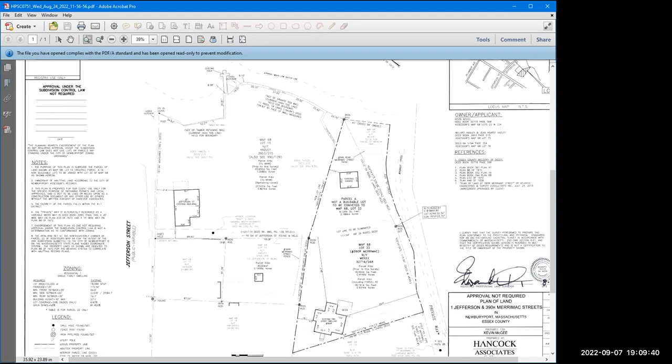Okay, I will take a motion to endorse the A&R plan for 1 Jefferson Street and 390R Merrimack Street. So Alden, second. Second. Okay, second, Rick. I'll take roll. Alden, yes. Bob, yes. Amy, yes. Heather, yes. Rick, yes. Richard, yes. So you have your A&R approved. Thank you very much. Endorsed.

We'll move then to the public hearing continued from our previous meeting on Market Landing Park. There was a list of issues that the board discussed last time that needed to be addressed, and we have representatives from the applicant team here to address them. I'll hand it over to you to speak first.

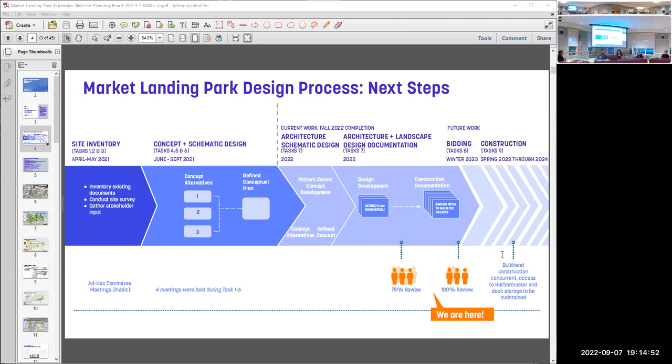Now we'll move into the feedback we received at our last hearing, which fell into a handful of general categories. The first is bicycle circulation and bike parking.

We've looked at adding additional bike parking, particularly on the east side of the park. The city has shared the current bike racks they are using, and we are looking to specify those.

There's a concern about widening the path where the shared use path meets the boardwalk, to provide space for bike dismounting, encourage people to walk through the boardwalk, and give a more generous entry point where there'll be a lot of pedestrian traffic.

We're also looking at redirecting traffic from the shared use path into the parking lot rather than into the future extension of the shared use path in the interim. There was a comment about revisiting the shared use path alignment, which is under the jurisdiction of City Council and the Waterfront Trust.

The second bucket was vehicular circulation and parking. The plan includes 2 EV spots, and the request was to add additional spots or make more spaces EV-ready, which we'll address in the presentation. We've also looked at interim parking conditions after just phase 1 is built, and we have that ready to share with you.

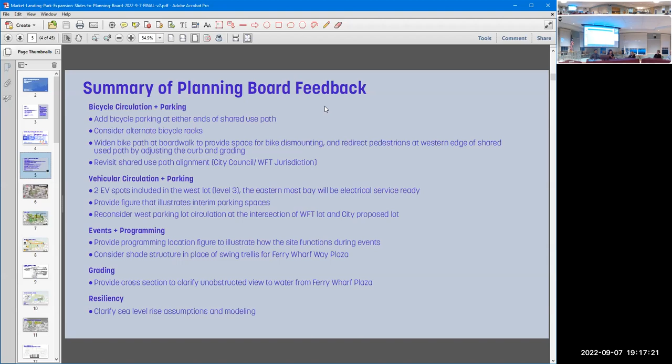For resiliency, we have provided a memo ahead of this meeting with the presentation, and Stephanie will be able to speak to those issues.

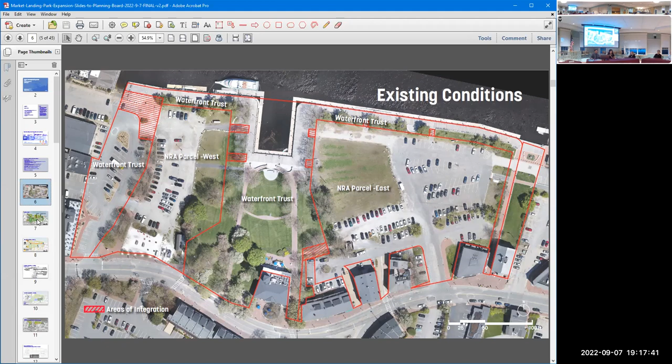Just to recap, this is the existing condition. As a reminder, we're working on the NRA parcel east and west. All of the Waterfront Trust area is existing to remain, and there are a few areas where we're coordinating with them to meet existing grade, which are hatched in red.

The final surface treatment of the area near the dock storage, where we're anticipating that will happen adjacent to the harbor master entry. We know there's been some concerns regarding what that surface treatment will be, and the city has requested that it not be lawn. So we'll be developing the details and material strategy for that in the 100% CDs.

The other thing to note is there have been some comments and recommendations on site furnishings. Because this is a public bid project, all of the site furnishings will have alternates, and we're currently reviewing the phase 1 cost estimate. We'll have a better sense of where we've landed, taking into account the input you've provided and costs and input we've received from previous stakeholders throughout the process.

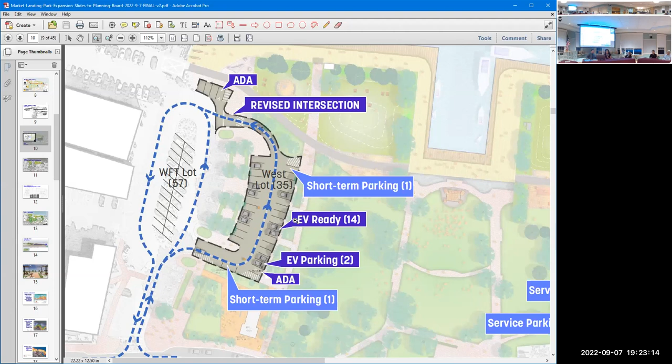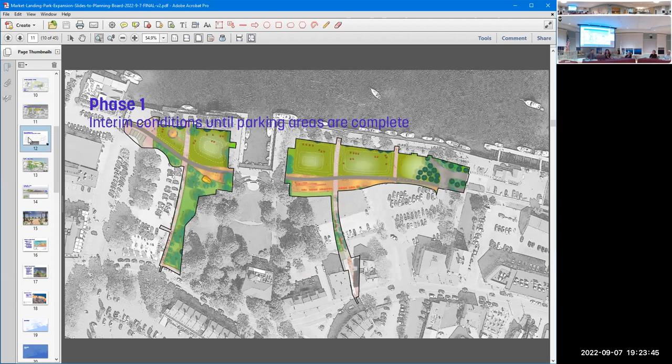And this shows an interim conditions parking proposal. We've managed to keep roughly the same number of parking spots as will be in place when the full parking lots in phase 2 are constructed. So we're very close - for the interim conditions, we'll have 166 spots total, and in the proposed, we'll have 167. I'd note visually, these lots remaining for phase 2, because there isn't the funding for it right now, will essentially be smaller gravel lots. There might be some utilities installed subsurface, but basically it'll be the gravel lots reduced in size, and we'll landscape to the edges as best we can based on the available budget.

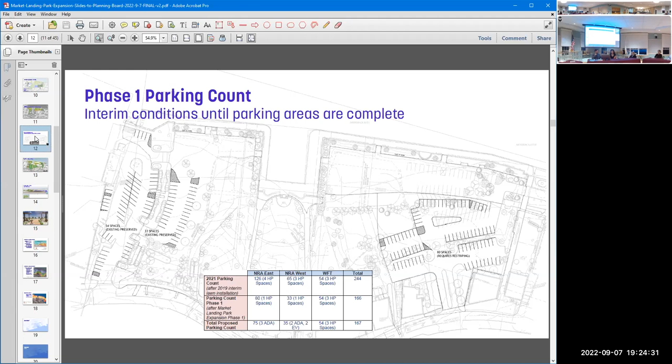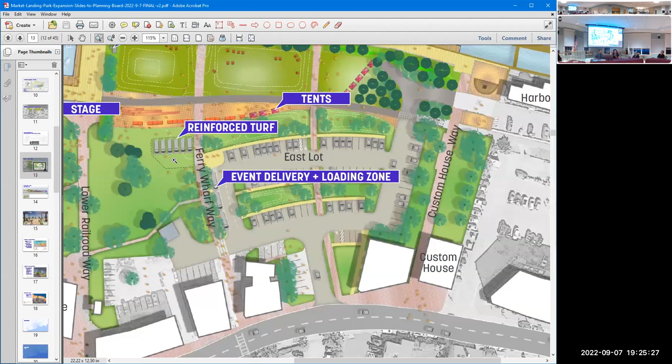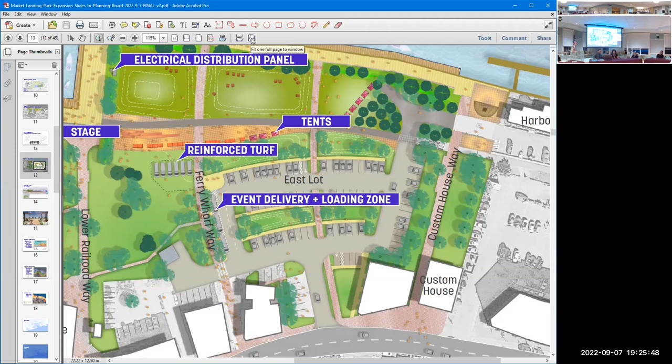And then we've also included a zone of reinforced turf. So this will look like lawn on the surface, but is vehicular grade so that trucks could drive up to this area for loading, unloading. This could also be a space used for food trucks, but it just provides that additional flexibility for future events. We've also shown diagrammatically where tents could be laid out, both in the plaza and in the lawn space adjacent to the harbor master entry drive. And then just noted where the electrical distribution panel will be relocated.

And so these 2 slides speak to the question around topography and views. This is a section we produced very early on to show the concept of grading for this project site. What we really wanted to do with that lawn space right up against the water is to take the height of the existing berms where those pine trees are along the boardwalk and meet that existing level, so that when you're on that lawn, it feels continuous and you're elevated a bit to get those views out to the water. The high point of those berms is at 13.5 elevation. When you're at the plaza or shared use path, you're at 13 or 13.37.

So as you can see, you'd be able to stand on the path and certainly see over that landscape. And we also have a view we can show in the next slide. If you notice the eye level - I'm 5'6", sort of the average human height - I could stand on that shared use path and see out to the water. And that's been the intention there.

Happy to open it up. You may have covered this previously, but I wanted to know, was there any discussion about bike sharing companies in terms of a third party and accommodations for that? Or no?

There hasn't been for this particular project. There was several years ago, we had some of those companies come in. Do we at least have the infrastructure in place so that 20 years out, it's not a major project to put that in? I'd have to say it's so much of an unknown right now as to how that would be integrated based on experience.

What I'd say is the parking areas are already a year or two out, just because of the lack of available funding right now. So I think we have sufficient time to consider incorporating those if it gets momentum, but right now we're not planning for it. Even several years ago, we had some of those folks in, and there wasn't a decision at that time to engage or bring them in.

It was partly on their end, but partly on the city side. So although it hasn't been brought up in relation to this specific project on Market Landing Park, it has been discussed in the city. It's not clear yet exactly how we would integrate that here properly without knowing it's going to be useful this far out. So I'd suggest we consider that for the parking areas, but if that opportunity shows itself, roll it into the parking lot at that point before we get to construction, essentially, based on what we know right now.

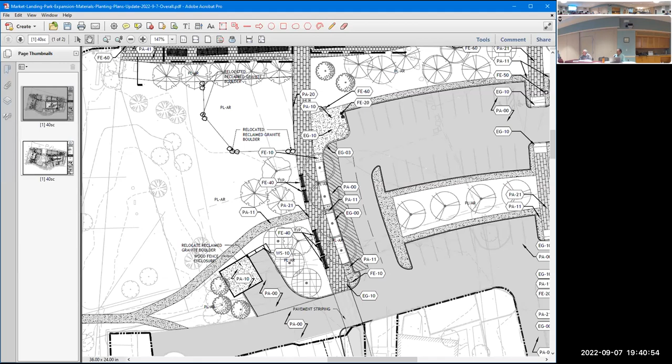It looked different in the presentation. That's part of the problem. When you compare the presentation slide that shows the service parking and the presentation slide that shows the bicycle lanes, they're right behind the hatch line area. So that's why I wanted to make sure. Gotcha, sorry for the confusion. It's probably just because it's such a small scale, and yeah, it will be hard to see.

I was disappointed, because originally we talked about trying to get the racks as close as possible to where people want to be, or where people are likely to go. And those, especially those 5, it's nowhere, it's not a destination there, and nobody's going to bike there. So I would repeat my suggestion from last time that you convert a couple of parking spaces, get rid of 2 parking spaces out of the 12 parking spaces. But I know that vehicles have a bigger constituency than bicycles. It's a hard point, but I'm going to keep saying that.

Over on the east side, where you say there are 3 additional bike racks, just want to clarify - so you've got the existing 3 at Custom House Way, and you're adding 3 more here, on the other side. Correct.

Certainly understand your concern or suggestion about bicycle parking potentially in lieu of vehicular parking. Unfortunately, we did hear the usual concerns and feedback, both from the parking clerk and the Waterfront Trust in particular, who aren't too keen on further reduction of the vehicular parking. Sasaki looked at the viability of putting the racks in based on the site grading, distance, and equipment being put in, and this is where we ended up. We tried to provide a few at the beginning of the trail there like you suggested, but there was a sense that there wasn't quite enough space in there to squeeze those.

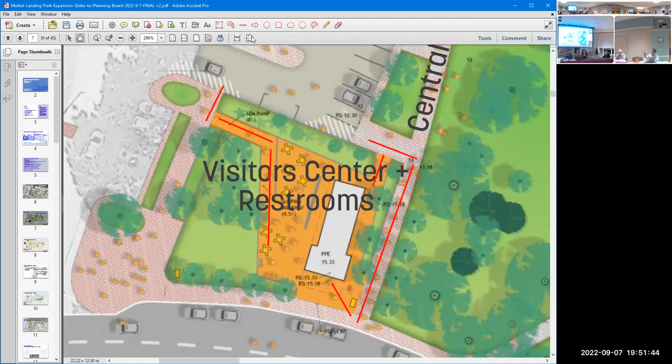There's one plan in your new slides that shows three service parking spaces, and another slide that shows an event delivery and loading area.

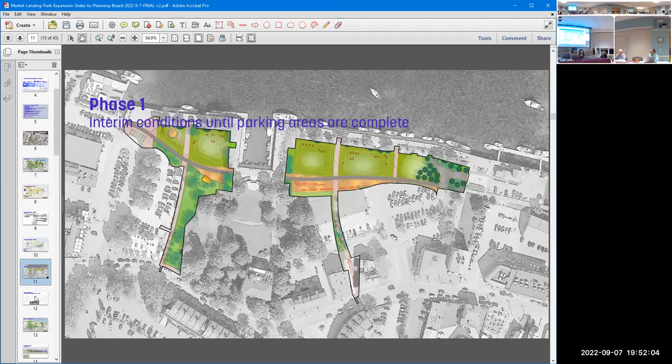I think I just used service as a general category in the larger parking diagram, but it is intended—there was a special request during our stakeholder meetings when we had specific review for vehicular access and for events, that those three areas be specifically loading and delivering for events.

On one of your plans, one of the illustrations, you point to I think three alternates for the swing area, and it says they'll be shown in 100%. So does that mean we're not going to see them?

Just to clarify, what I had talked about with Sasaki is, essentially, as designers they might specify something that's the perfect product. But because we're a public entity, we have to do public bidding. We have to provide alternates as part of the state statutory or regulatory process for procurement. So we provide alternates—they're comparable examples. The bidder, we can sort of take it from there and wrestle with them sometimes if we're trying to press for the right one. But we have to provide alternates during the bid.

One of the discussion points that came up was, as we were discussing with the city council, the budget for the project and the desire to do the base or the frame of this project first, and then prioritize the areas for donations for site elements that would be real tangible elements people could see, and be potentially more interested in funding than say subsurface utilities.

We were looking at the actual cost of each of the individual elements, and some of the swing elements—the structure and the swing itself—would be upwards of $50,000. I had asked them to sharpen the pencils, so to speak, and look at other alternatives. We also looked at, for instance, the timber structures on the rail trail just off the way here, over by Oldies—examples like that would be like a $10,000 installation as opposed to a $50,000 installation.

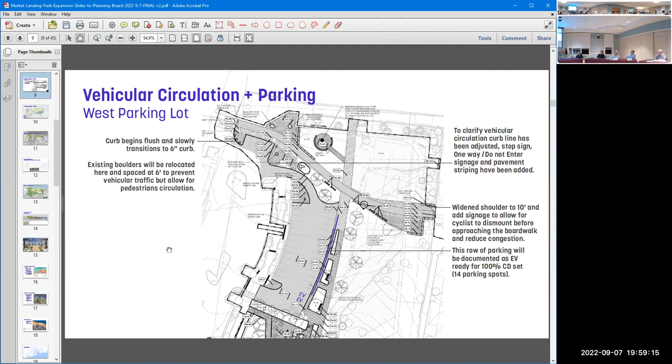On the west parking lot detail that we have, let's just zoom in on that area of the picture. This is just a question for me: the symbology here shows one symbol for going through, and another symbol for this kind of brick shape - I know it's not brick, but that kind of symbol. Does that just refer to the strength of the pavement?

I got you - your concern is that maybe we should provide more of a cue, same treatment of material, because you just didn't know what it is. I think that's referred to as different - right, these are pavers and that is asphalt, to your point.

So I guess maybe you're suggesting that we possibly extend asphalt here. I have no issue or objection with that myself. I don't know, from our perspective, I think it's just a detail adjustment in that area, so I don't see that it's much of a problem.

Gotcha. Would also be - just in that one, just in that one little area where the transition happens. Yep, gotcha, okay.

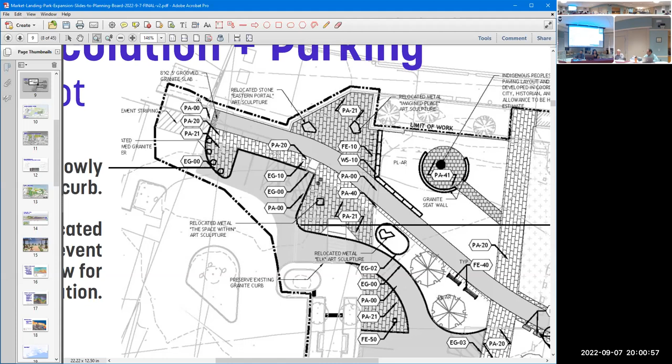The section through the topography section - if you can zoom in, right, with the 13.0, 13.37. That makes it look like that area is higher than the area leading to it. Is that his interpretation?

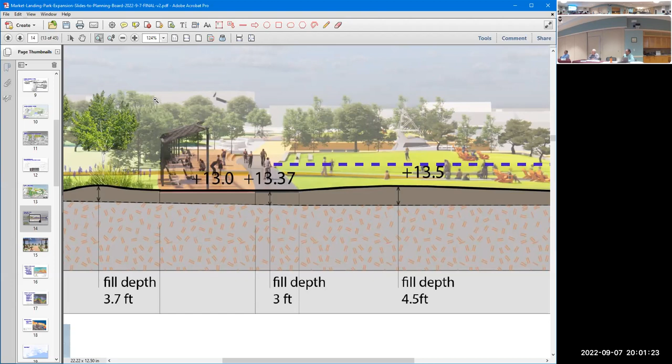No, where the section is cut, that is correct. This is what I was referring to as the grade change. From this point, the shared use path slopes down to meet the boardwalk, and that's where you have that grade change, so the plaza becomes higher than the shared use path.

You can kind of see in the background a little bit of that stepping back here, but as Maren mentioned, you wouldn't necessarily have it right where the cross section is - it's a little more flush here, so it basically tapers towards the embayment. I wonder if that's just that particular point, and things are changing as the swing area is going.

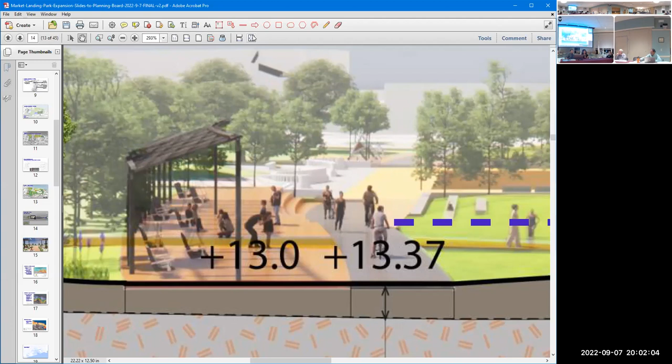Correct. And then my last two questions - I read the report carefully and got confused, and you mentioned it tonight. Why does the Massachusetts projection of the scenario, which is a 50-inch increase, show a smaller flood extent than the FEMA plus 40? I just didn't understand.

No, I'm sorry - it shows a smaller extent for current flooding. Oh, so you're saying why does it show... You said it shows smaller flood extent than FEMA plus SLR. So FEMA plus SLR is FEMA plus 40, and MCFRM is something plus 50, so I just didn't understand.

So it's not a straight addition. It has to do with the MCFRM actually taking different ocean dynamics into account than FEMA does. FEMA doesn't have the detailed topography that was used for the MCFRM. It doesn't include wave runup, but it includes different things in the modeling, so it's not just additive.

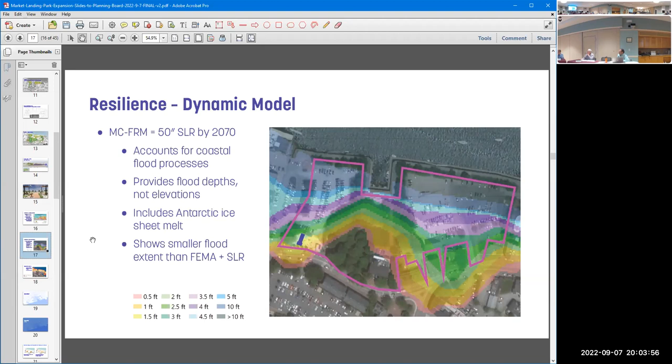And then my last question is about when you get to the point of daily tidal flooding - I don't remember when that is - how will that affect the condition of the paved surfaces and such? If you could go back - you want the site plan?

Forward two slides. So this figure is showing current conditions, current topography, with future mean high water elevations. What it's not showing is the change in topography that will result from this project, so there actually won't be daily flooding on the site because of the project.

So it's going to avoid that - the paths are going to be raised above that level. Right, exactly, so this is what we're avoiding.

I need to look more carefully at the future elevation. Yeah, so between site grading and the bulkhead project, these are all things that are going to eliminate tidal flooding to an extent. There'll come a point, once you get to 6 feet, before that point it's addressed.

Thank you for acknowledging. Sorry.

Anyone else? Heather, do you have anything?

Jamie, yes, can you hear me? Okay, good - can't tell, you can tell if it's green. Oh, it's not. No, push on the power. Testing, you can't hear anything, you just have to see it's green. And then you're going through the system, Heather, and the recording.

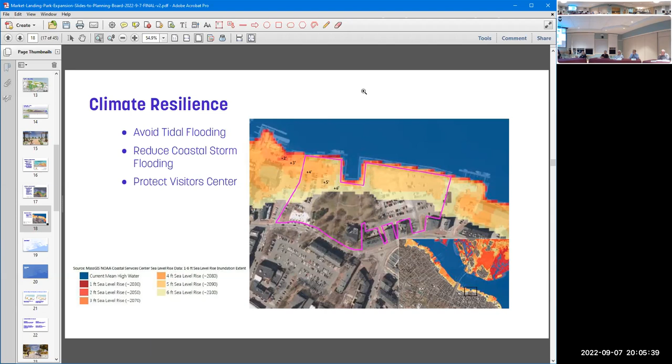Very good, thank you. So all my comments were addressed already by others, but the trellis kind of triggered a new thought in my mind - to the extent it's controversial, I think it only makes it more imperative that we have it well defined at the approval phase. I'm curious, I have a question that's also a comment.

The question would be, I would imagine the entire thing is a product that you have to get three separate product options for. I would think some aspect of it is custom, so you'd get three bids for a custom product. So I think some aspect - the swing, the actual sitting part of the swing and the components - those are products.

But I would think the trellis would be something you could design with some specificity that we could approve, because I think that's just too important an item to leave to some down the road.

Sure, I'll defer to Maren if she wants to speak from the designers' or team's end, but there are some complexities to this. I would suggest, rather than expecting the board to specify the exact product, we set certain parameters for what you're looking for. For instance, if we're talking about integrating the swing elements, we can reference that. We don't want to create a problem under procurement laws where we have to substantively provide what we're looking for, with some vendor alternates. They can come back with a submittal of their own to suggest it meets the criteria, but we have to demonstrate what they're providing.

We did look at, for instance, the wood structures, the timber structures that the city had put in for the rail trail. Those are relatively low cost. We know how the footings are, we know structurally how those are built. But we have to consider whether there's any further structural design needed depending on the item chosen, whether the footing gets adjusted. So I wouldn't want to pin us down to one specific product, but if you want us to be more specific about what's included or not, like Bonnie mentioned earlier, whether there's some sort of canopy that can be placed up there, that might be easier to accomplish than specifying the exact product now.

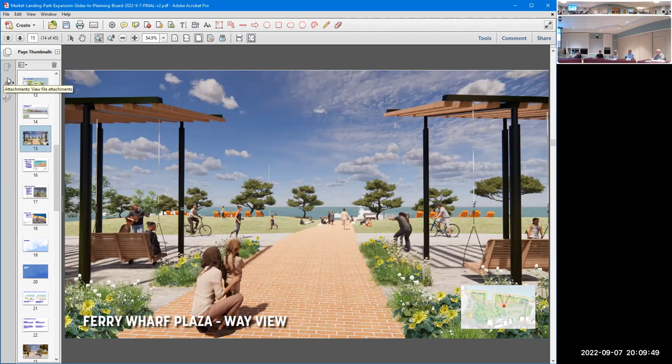Question having to do with the design of the plazas, in relationship to flooding. Is there any consideration that the plazas along the waterfront be designed other than just a flat surface?

I don't fully understand what the design is dealing with in terms of response, but flooding happens more regularly before you get sea level rise. So I'm thinking about response to flooding in plazas, where you might design it so the plaza absorbs and contains the water, with runoff after the flood event is over. I'm wondering if the plazas are designed like that, and if not, why?

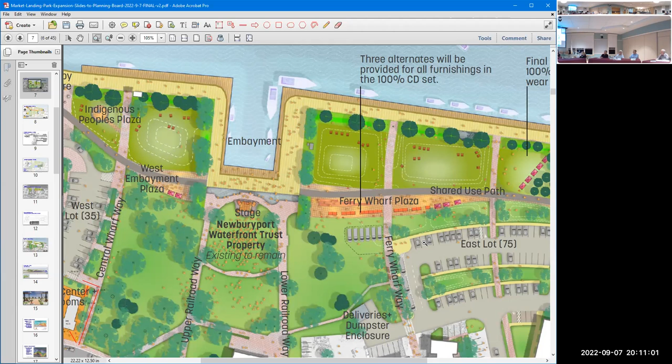Most of the plazas are designed to be at a higher elevation, so even with sea level rise, they would be above that flood elevation. Ferry Wharf Plaza is high, as we saw in that section, about 3 feet higher than the shared use path at the existing grade at that point, so that will remain dry with flooding. We've certainly taken into account stormwater flooding, and the whole park is being designed to properly handle stormwater.

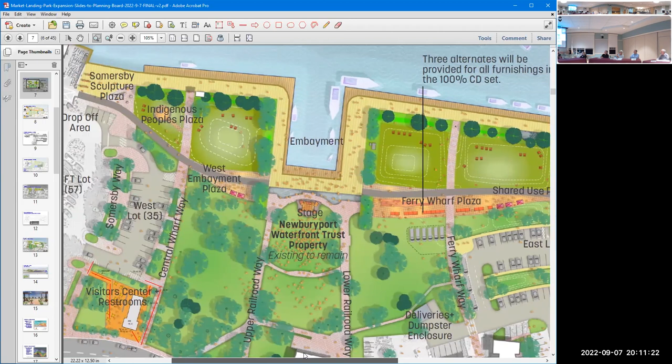There's a Somersby Sculpture Plaza to the far west, and other areas that are not plazas, like on the other side of Central Wharf Way, which is grass area. These are planted areas. Over toward the water is the Indigenous Peoples Plaza, which is just a small circular seating area surrounded by a sort of fire pit type feature.

Going across Central Wharf Way, there are some circles on the waterfront. That's just the topographic diagrammatic indication of the change where we're bringing the grade up behind the berm.

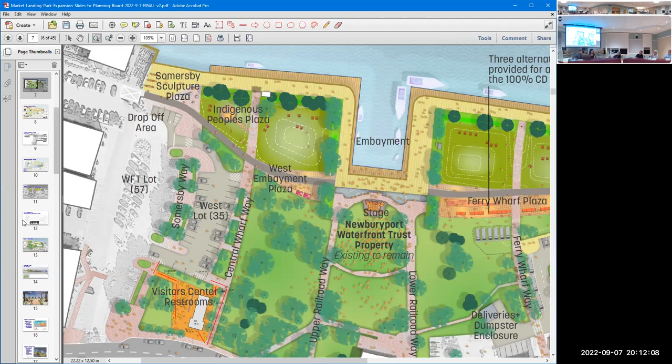Per that cross section, this is the fill we're adding behind the berm, so that in addition to folks sitting on the berm today in the chairs, you'd be able to sit back here and be at the same height essentially. Those older graphical lines that look like circles might be a little misleading because it's actually more gradual, more rectangular, tapering off toward the pedestrian walkways. It's essentially a raised lawn to be commensurate with the berm across that area.

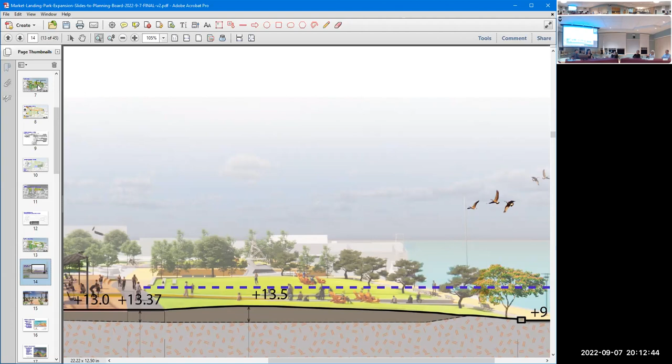It's not like a peak or anything, and it's not paved in any way as a plaza. That's why my question didn't make sense to you, because I thought all those areas along the waterfront were going to be paved. No, we certainly wanted to avoid that.

As mentioned earlier, because of the frequent, routine annual disturbance of this area from the docks, there was a concern about having to constantly restore the grass at the start of every season. So the thought was possibly having a different material there. We're examining that further before going out to bid, but we'd like to allow some flexibility, whether it's a higher grade synthetic turf or a permeable paver or something like that, so it doesn't create an annual issue where the Parks Department, the Waterfront Trust, or some other entity is constantly dealing with grass maintenance because the docks are coming and going from the spot.

Right, that makes sense. But everything else in that area would be lawn.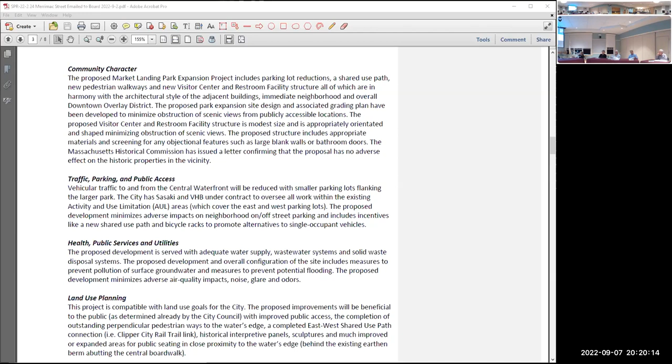Open space and environmental protection. This expansion project maximizes open space usage for the residents of Newburyport and is integrated into the natural landscape. The proposed site design minimizes adverse environmental impacts for the central waterfront and incorporates a landscape design that favors native and drought-tolerant species and avoids invasive plants.

In accordance with the Massachusetts Contingency Plan and MGL 21E, a licensed site professional will be responsible for ensuring environmental compliance, e.g. handling, backfill, and/or disposal of contaminated soils.

And that covers the findings. Another page and a half, hang in there, folks, thank you. This project meets the performance standards as listed in section 15H of the Newburyport zoning ordinance in the following ways.

Pedestrian and vehicular access and traffic impact. The site plan shows adequate vehicular access from Merrimac Street into the parking lots on the site. All proposed walkways provide pedestrians, bicyclists, and motorists safe sight distance when exiting Merrimac Street. All new walkways are fully accessible, pertaining to pitch, transitions, railings, and turning radius. The proposed site plan ensures safe interior circulation by separating pedestrian and vehicular traffic within the site.

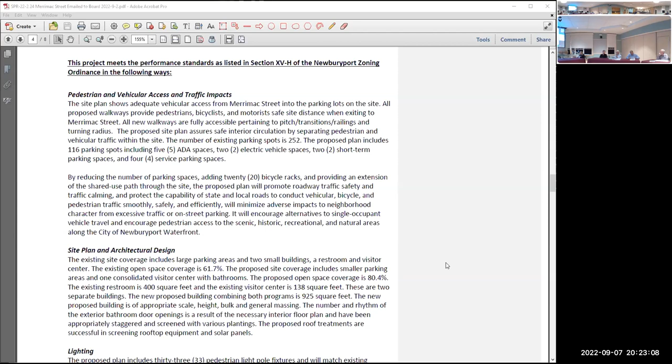I'm wondering if there are changes in those numbers for parking. I would just note for the record, to your point, Caitlin and I will take a look at this such that the final draft of this includes the exact numbers, just to make sure we realize there might just be numbers, just the numbers. You include the EV capable. We'll add that as well.

Site plan and architectural design. The existing site coverage includes large parking areas and 2 small buildings, the restroom and visitor center. The existing open space coverage is 61.7%. The proposed site coverage includes smaller parking areas and 1 consolidated visitor center with bathroom. The proposed open space coverage is 80.4%.

The existing restroom is 400 square feet, and the existing visitor center is 138 square feet. These are 2 separate buildings. The new proposed building combining both programs is 925 square feet. The new proposed building is of appropriate scale, height, build, bulk, and general massing. The number and rhythm of the exterior bathroom door openings is a result of the necessary interior floor plan and have been appropriately staggered and screened with various planting.

Proposed roof treatments are successful in screening rooftop equipment and solar panels. That last sentence is not included in the site plan review. I would suggest, and I can check with Caitlin, that we actually remove that last sentence and leave entirely this determination of the planning board under the DOD. I realize that under site plan review, the planning board does have architectural criteria to some limited degree, but I agree we should take out that last sentence because you still have to have a discussion about the building and the DOD.

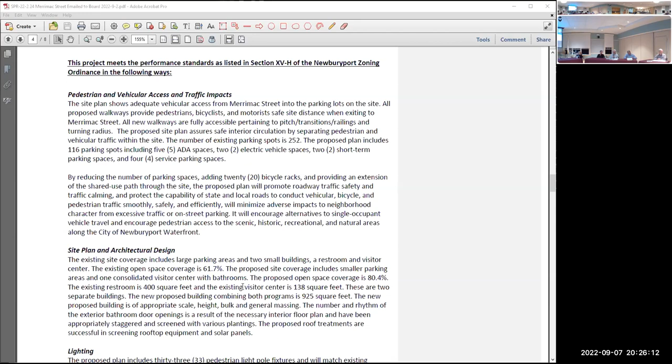Landscaping, yes. I wonder whether we even need to specify the models because they may change the model. Could we just take out... I think something like shoebox style fixtures or something like that might be preferable, even just at least the... I agree, I think that's preferable. Caitlin was being very specific based on what was submitted, but I think you're right that it's preferable, consistent in capturing the substance but not being too specific, because we have to do a public bidding and have alternates. But they still have to meet the same standards, so, thank you. The generic description.

Landscape buffer areas have been incorporated into the proposed plan in the following areas: parking lots, harbor master entry drive, dumpster enclosure and delivery parking. This includes a mix of evergreen and deciduous trees as well as ground cover and shrub planting.

The east parking lot contains 80 parking spaces and 34 trees in the parking islands and surrounding areas, for a ratio of 4 trees per 10 spots. The west parking lot contains 35 parking spaces and 17 trees in the parking islands and surrounding areas, for a ratio of 5 trees per 10 spots.

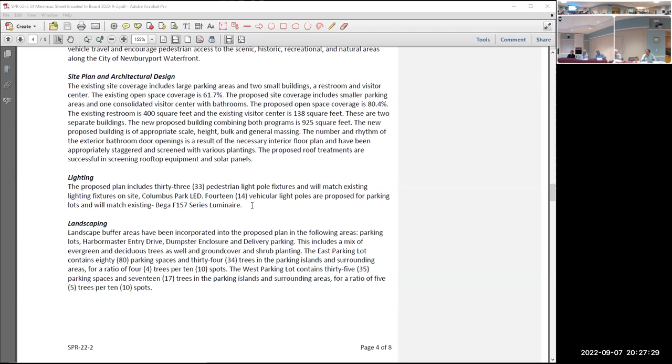Stormwater runoff, water quality, wetlands, and erosion control: the proposed project will include measures to prevent stormwater pollution, minimize erosion, and potential flooding, as described in the stormwater management report submitted with the stormwater management permit application on July 15, 2022.

That's still relevant and updated, right? Yeah, it is accurate. That stormwater management report has been updated, so we can just revise the date in here. Whatever, July 15th, I think it might be yesterday's date, but we can adjust that.

Environmental performance standards: the proposed plans address the development and performance standards referenced within section 11 of the Newburyport zoning ordinance. The proposed project and use will not be conducted in a manner as to create, and then it's quoted from the ordinance.

Utilities: the site will be served by existing utility systems, including sanitary sewer, water, and electric. The proposed visitor center and restroom facility will be connected to the existing sanitary sewer and water lines in Merrimac Street. New water mains will also be connected from Merrimac Street, Water Street to serve new wet fire hydrants for fire protection in the park and docks. Electric service to the park and docks will be provided from the existing underground electric conduits in Water Street. The existing electrical infrastructure will be relocated and raised to coordinate with the proposed park design.

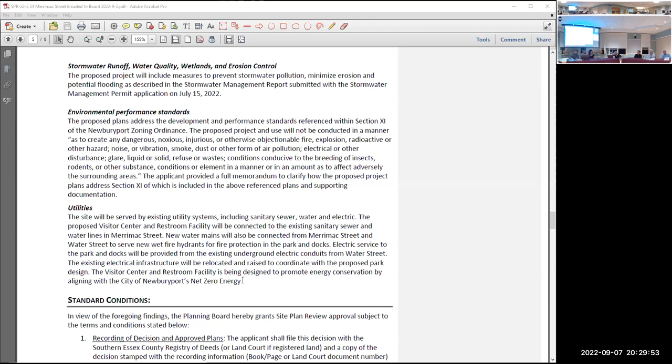Standard special conditions. In addition to the foregoing standard conditions, the planning board hereby grants approval subject to the special conditions stated below. The applicant shall resubmit the stormwater management report to the city engineer and director of planning and development prior to the start of construction, in accordance with the email communication and requested changes noted in the city engineer's email to the Office of Planning and Development dated August 31st, 2022.

I would note, just because we did just receive the revised stormwater management plan, it might be unnecessary for this condition to be included at your next meeting when you take a vote. So we will accordingly probably remove this once we hear back from the city engineer that Sasaki's revisions to the plan are sufficient. Just a couple of minor tweaks, but we do want to hear from the city engineer that he's satisfied. Well, I know he said in that memo that his report is acceptable. You want to dot the i's and cross the t's. Well, given that you're not closing this hearing until next meeting, we can just incorporate — there won't be a need then for the condition.

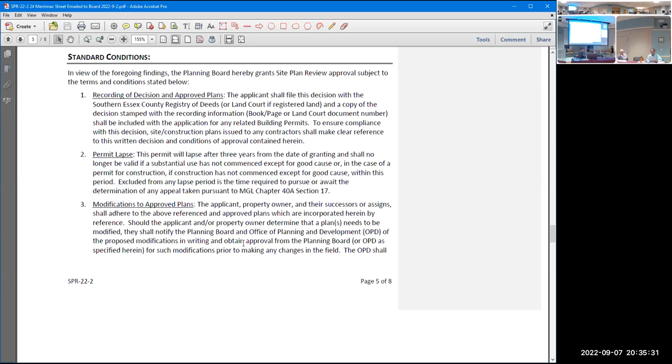Under the site plan and architectural design, it refers to the screening with various plantings. Is screening only going to be plantings, or is there going to be some kind of structural element? No, there's the structural element as well, but it's part of the landscaping screening, not part of the building. The intention is to install all of that together.

I understand, but that's why I was saying maybe we should adjust that sentence a little bit -- you could just say appropriately staggered the screening, or say as shown in the drawings. We can take that phrasing out just to be simpler.

Good, so that's cleaned up, and we will look at the items that we highlighted to make sure that they are appropriately worded before we finalize.

Is there anything else? I have a suggestion. Obviously, there are going to be some changes to the plan, but I think there are some areas we've really focused on here, and it would be helpful to include some details, like in the detail we have earlier.

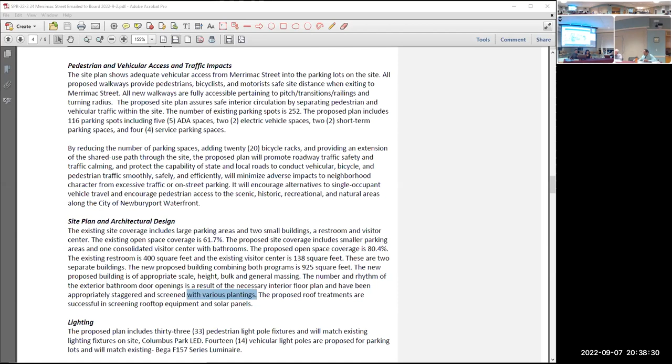On the east lot, I think showing very clearly what the relationship is between the bicycle parking and the service vehicle, and perhaps a slight widening of the path, so there's a bike connection from the shared use path to the bike racks. Right now it's suggesting it's through the parking lot. If we could just have that walkway widened between the shared use path and the bike racks, it might solve some issues.

Okay, we'll take a look. We'll have to look at the grading, utilities and all that, but we'll see if we can make a little more width there. And then having a detail showing the bike parking, a blow-up detail to show how that works - I don't know if there's anything helpful to visualize it.

I guess I just want to say, I don't think we need to have a lot resubmitted. There are a lot of details, planting plans and everything that aren't changing, so to the extent they're not changing, we just submit the revised sheets.

We were planning on only resubmitting the drawing sheets that have been adjusted, for clarity, simplicity and reference. So on OpenGov, as opposed to overlaying the original plan set, we'll put them at the bottom as a new plan set with just the sheets that have changed. That'll probably be the more organized way for all of us to deal with that.

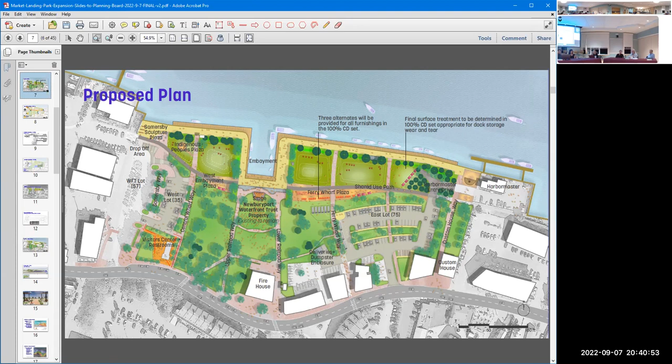Please continue to the 21st. Would like to make that motion? I'll second, Richard's going to second it. And I will take roll, make sure we're all on board with that. Alden, yes. Jamie, yes. Heather, yes. Rick, yes. Richard, yeah. Bonnie, yeah. So we will see you again, both on site plan review and on...

Thank you. Talking us through the resiliency.